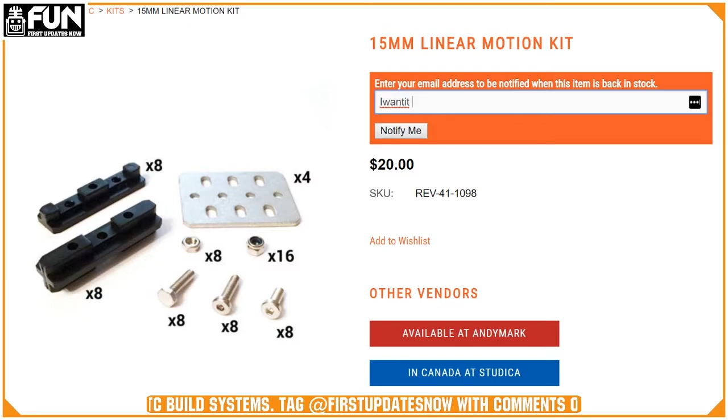So we talked about this a little bit earlier, but another great thing that you can get kit-wise is the Rev Linear Motion Kit. You can't get the kit right now, I'm pretty sure. As Greg said, that kit part 2 will be in stock starting Friday. So the linear motion kit is always great. It's pretty cheap as well. It's just the kit, so then you need to get the extrusion, but it's pretty great to have.

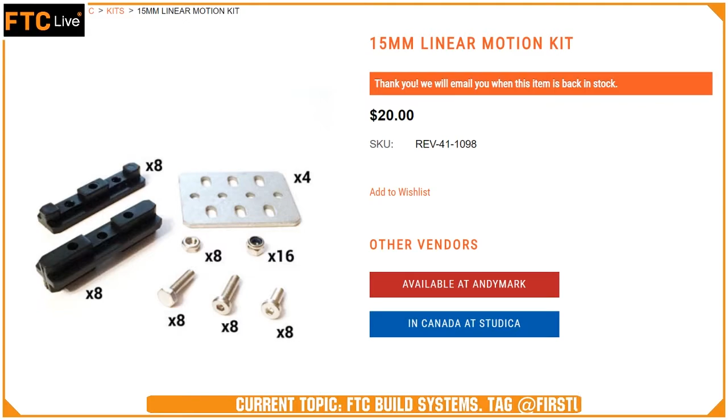Yes, we're going to get to VEX Pro in a second, Zanford. Another great thing you can get are Rev ball bearings. I think we talked about those earlier, though. Those go well with the linear motion kit.

Heading back to AndyMark, there's some gearboxes that you can get. AndyMark makes Sport gearboxes, which I personally love. There's a lot of people that have mixed opinions on that, but I think these Sport gearboxes are great. They're pretty expensive, though. But they are very easy to mount to things, especially if you're doing custom like my team did, and they're very easy to use. I don't know if anyone wants to share their quick opinion on that.

I'm not sure if they're meant to be used with Tetrix, but we found that the holes on the gearboxes line up perfectly with Tetrix channel. Oh, yeah.

They're also very efficient. Just in general, the gearbox design is very efficient, so you're going to get a lot of speed and power instead of losing out on some friction. And something cool with them is that they have a nub attached. So what we found is if you want to put a 6mm D shaft in, I think it also might work with 5mm hex, you can just put the set screw right down on top of it. It's got a nub built in. You can also mount a wheel or something directly to it because there are screw-ins on the rotating part of the motor.

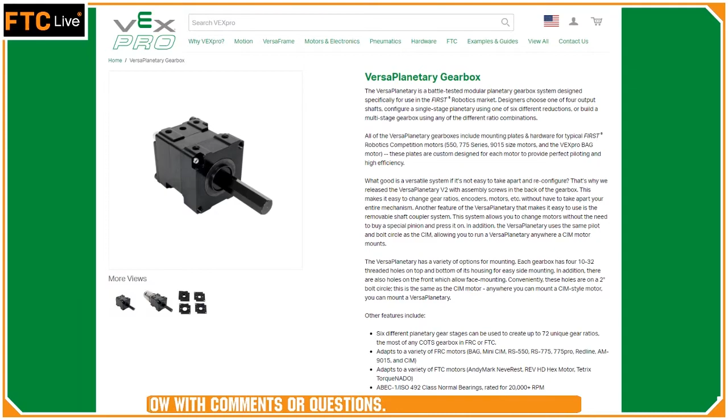Jumping over to Vex for a second. Vex has 2 great gearboxes that can be used for FTC. One is their Versa Planetary gearbox, mainly used in FRC, but it can also be used on NeveRest motors. The gearbox is great. It's metal, so it's super sturdy. From what I've heard, it won't break.

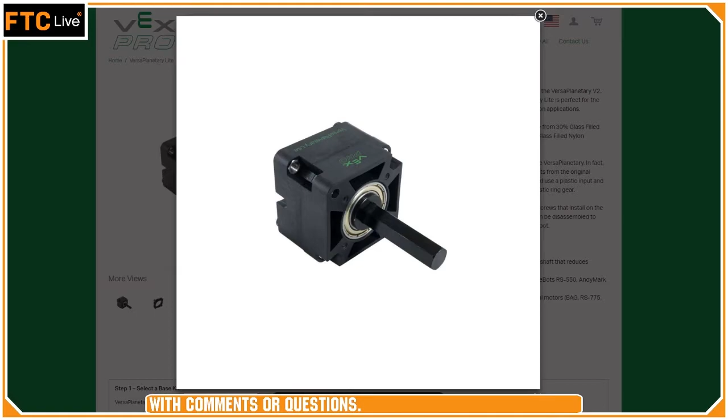Yeah, it's great. Then they make what's called the Planetary Lite, which is the plastic version of that same gearbox. So it's got a lower profile. It weighs less, which is nice for FTC. I haven't really talked to anyone who's used that, but I'm guessing it works very much the same as the Planetary. Yeah, they're both really great options, and I know a lot of teams at Worlds use them because of their hex output. With these, it's very easy to mount compared to other gearboxes.

Mm-hmm. They're primarily FRC gearboxes, so there's no way you're ever going to break them. And you can swap the stages. So if you say, okay, I'm going to start with 26:1 on my drivetrain, you can take the gearbox apart and go to a faster or a slower gear ratio basically whenever you want, which is a huge advantage to the VP system.

Yep. Another great thing, we talked about earlier, Rev Smart servos. They work great with every system. I think they're the best servo on the market for FTC because they're programmable, because they're super strong. You can kind of beat them up as much as possible. So they're great. Lastly, I love these. They're the Nexus Mecanum wheels. If we can throw a pic of those up, that would be great.

I will throw up the picture if you pronounce it correctly. Nexus Mecanum wheels. Try again. Mecanum. When I was writing it, I knew that I needed to say Mecanum, but it's just so automatic.

These Mecanum wheels are really great. They're really smooth. They work well. You can buy them, I think. We use them, and yeah, we've tried out so many different types of Mecanum wheels, and these are by far the best. Mm-hmm. Yeah, I think they're the best Mecanum wheels on the market.

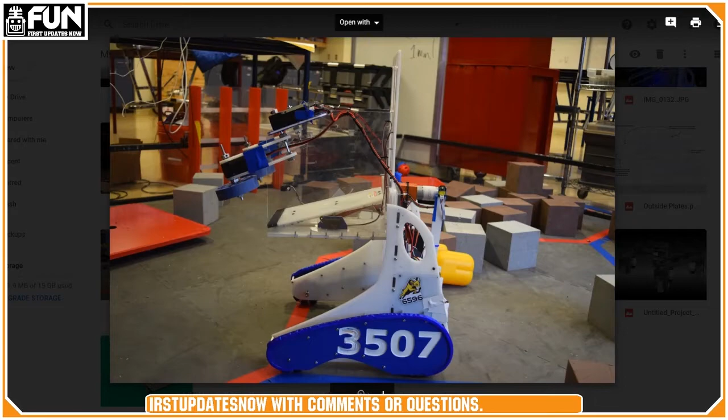So I think we're going to move on to our last, I don't think you can call it a build system, but our last way of building robots, which would be custom robots. So I guess maybe I'll interview myself. What's unique about this route? I think what's unique, and there's a whole picture album that we'll throw up, a lot of it's from my team, a lot from others, is you can do whatever you want with custom. There's infinite amounts of creativity because you can blend custom with any build system around.

There's a few ways to do custom, as you can see right now on the screen. This is all plastic. We used HDPE and polycarbonate. You can also use PETG. You can do custom metal if you wanted. You can do metal. Yeah, that's what I was going to get to next.

But you just have to have the resources to be able to cut it up and all that. Yeah, that's the thing about custom. You do have to have a decent amount of tools, like a CNC or 3D printer, that can make custom parts. Or sponsors. And you have to have team members that are able to actually build custom bots. It can be hard to learn how to 3D print or CAD or CNC.

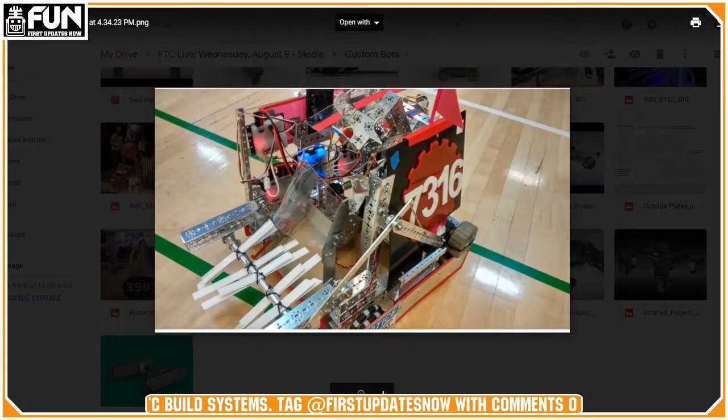So you just have to learn it. And then the biggest thing is resources. So that's where it can be hard for young teams, rookie teams, even veteran teams. It's so hard to actually get that consistency. Because if you're going to do custom, you really have to do custom. It's hard to half do custom and do part of your robot and then quit on it during the season. You have to be dedicated if you're going to do it.

So I know with custom, we've sort of gone that route and we're moving more towards it, but a lot of custom robots still use the Actobotics motion because that Actobotics motion is really great. Or they still use the Rev Linear Slide Kit because it's very hard to make your own custom linear slides. So a lot of the custom robots are not just custom. They're a blend of everything, and I think that's what makes them very successful.

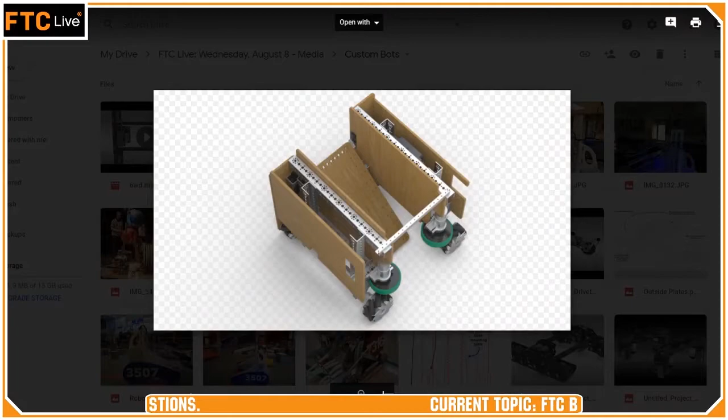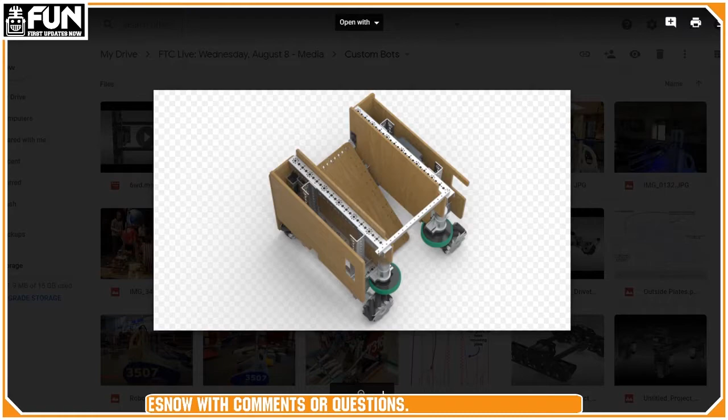So this is the Tetrix custom bot. I have now forgotten the team, but this was Tetrix channel, as you can see, with wood plates, wood dump plate, and the Nexus mecanum wheels that we were talking about earlier, along with compliant wheels. So you can see a lot of what we've talked about so far in the show going on right here with this bot. That's the biggest thing, blending.

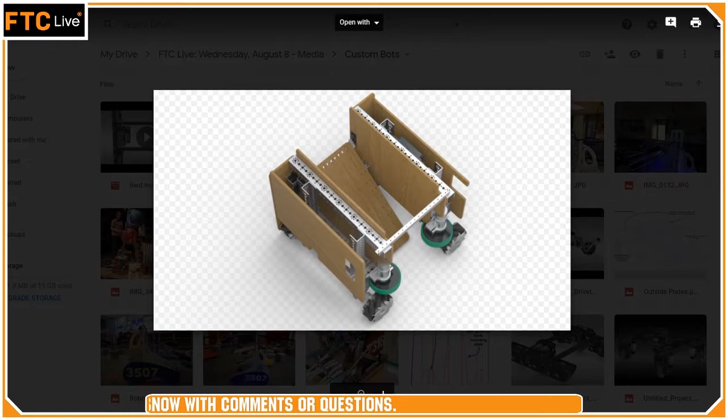My favorite part about custom is it allows you to use whatever you want. My team has now chosen the custom route, and no longer are we just going and buying kits. We're now buying specific parts and specific things that we want to aid in our custom. So if you're interested in building a custom robot, I highly recommend talking to one of the teams that already is on that route, because it can be very daunting at first, but once you grasp how it works, it'll be a lot easier for you.

Yep. Nathan, I don't know what your experience with this was, but did you find custom was a little more fun to build with instead of just Actobotics or Rev or something? I thought it was really fun. Tyler, can you pull up one of the technical drawings that I have there? Any of them? So I thought it was really fun because we were able to do whatever we want, and we had so many different iterations.

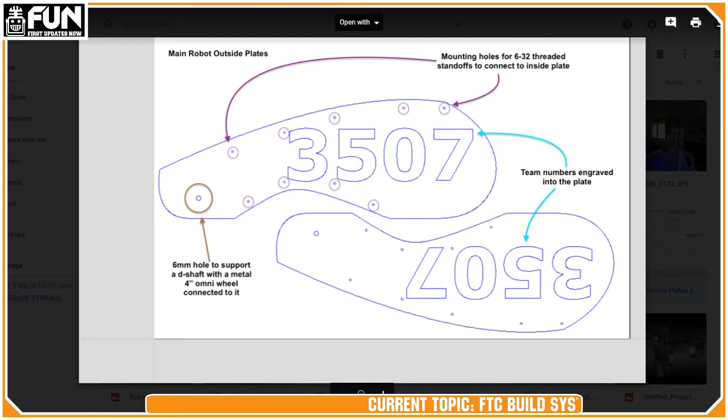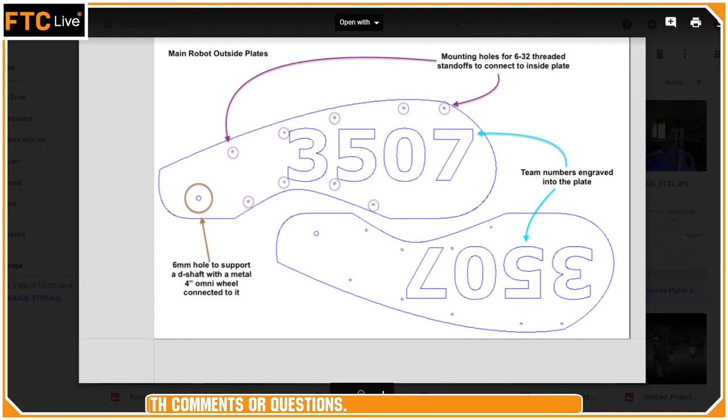So as you're looking right here, this was one of our side plates. This was probably the fifth or sixth version of this side plate. Originally, it was just a rectangle, and then we ended up messing around with it and continually turning it into what almost became an automotive, car kind of design for a robot. So I really had fun with it. And at the same time, it allowed us to do whatever we want. There was that kind of infinite creativity, as I keep talking about.

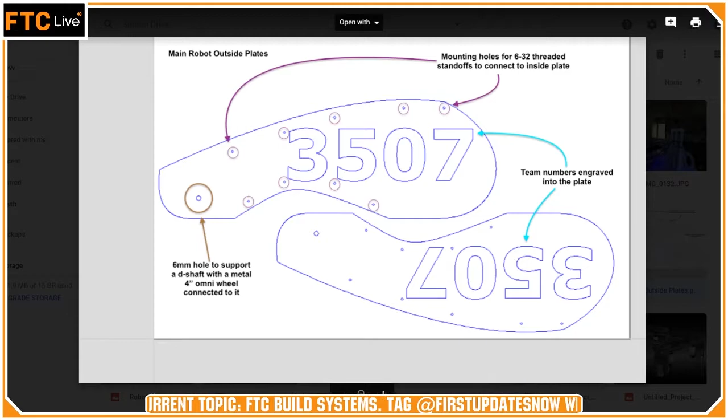And as someone mentioned, using kits doesn't necessarily mean not using custom. I think I put a picture in the folder from a Velocity Vortex bot last year. I don't know if you can easily find that, Tyler.

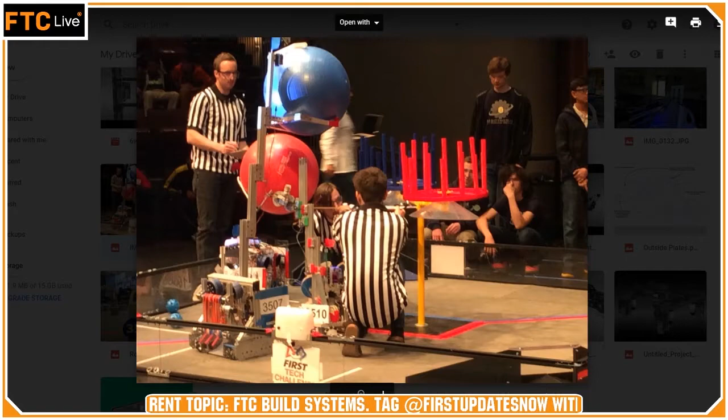It's next to the claw right there. So as you can see right there, that's our robot with the blue cap ball. I couldn't find a better picture of our robot from last year, but that was a TileRunner drivetrain with 1 inch, with 80/20 linear slide lift, along with custom sort of. The forks on the edge of that forklift were 3D printed. That whole assembly on the front that you can kind of see in red/orange was all 3D printed.

You can't really see it here, but the motor mounts for our shooter wheels were 3D printed. So there's a lot that you can do with custom. It's not just limited to going full custom like my team this year. You can also 3D print parts and kind of just fill the gap wherever there is a gap with custom parts. I'd just like to take 1 second and say 3D printing is one of the most valuable tools any FTC team can have.

And I think it really changed the way that our team saw designing and building our robot. Not as a rookie team, but as a second or third year team, if you've gotten it down to building with the systems, I think that 3D printing is the next step in transitioning between using kits and going towards custom. And it's really helped us be able to bridge the gap between different systems.

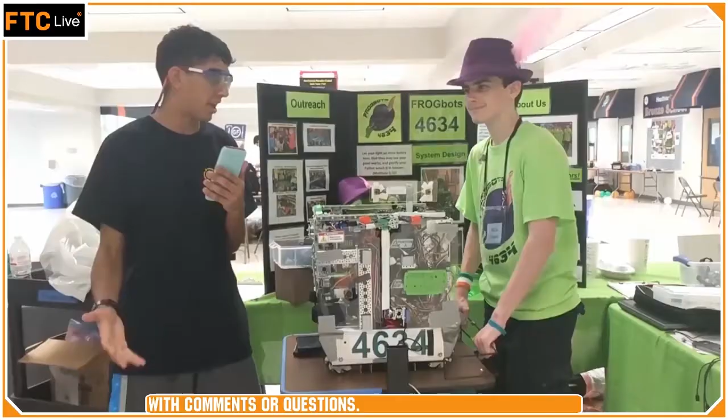From Lino C: what material do you use to 3D print, ABS, PLA? We used ABS this past year, but we're switching away from ABS and moving towards PETG and PLA due to the toxicity of ABS. We were breathing those fumes for multiple hours, and it's probably not the healthiest thing. But I will say our experience using ABS to print parts was very nice. We were able to build very strong parts that were very reliable.

Mm-hmm. And I lost my train of thought for a sec.

Sorry, guys. For 3D printing, my team uses PLA, and then we also use NinjaFlex. Ninja Flex can be great if you want to print anything flexible. There's a little bit of a learning curve for it, so find a YouTube video on it, or just contact any of us.

We actually made our intake for Relic Recovery using Ninja Flex, and that was one of the best decisions we ever made because we were able to get a certain compliance that you can't get with the compliant wheels made by AndyMark. Yeah, we started our season with a flipper intake that we actually used on our bot last year as our intake, all made out of Ninja Flex. Wasn't effective though.